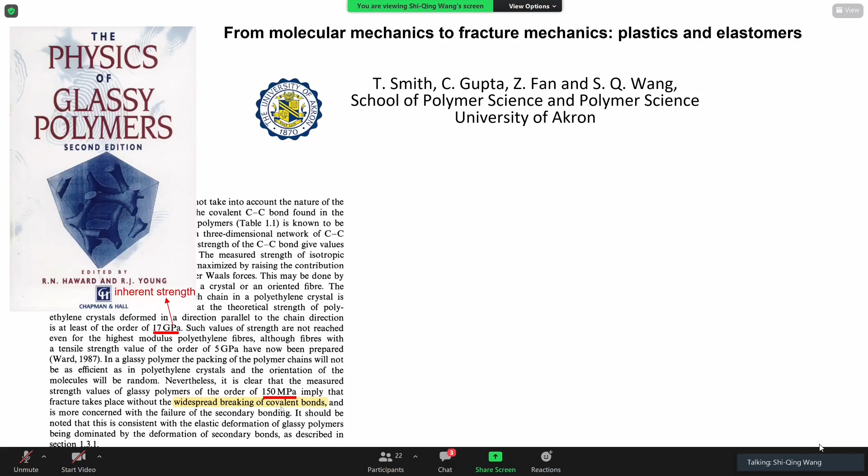Now we finally have a chance to look at this issue of the whole picture of mechanics of polymers. If you open any textbook, we are really puzzled by the fact that the intrinsic strength is always 100 times larger than nominal strength. Many textbooks will say the same thing. So today, I'm hoping to answer a few questions related to that.

These are three main questions: whether the inherent strengths are actually comparable to the nominal strength. In that case, the fracture behavior of uncut polymers really is not a fracture mechanical problem. And I will also try to show and convince myself I understand why and how fracture mechanics works for polymers when you have a large cut. And then lastly, I hope through our work I could show you that when you consider fracture mechanics, there may be an alternative way to think about toughness.

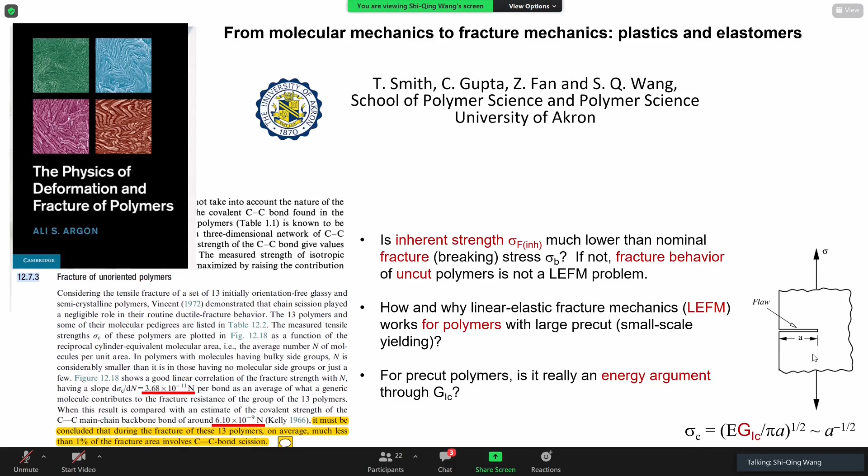Toughness, in the sense of us usually attributing fracture strength to critical energy release rate. This was done, of course, with my students, nothing can be done without them - 3 of my students, and sponsored by NSF.

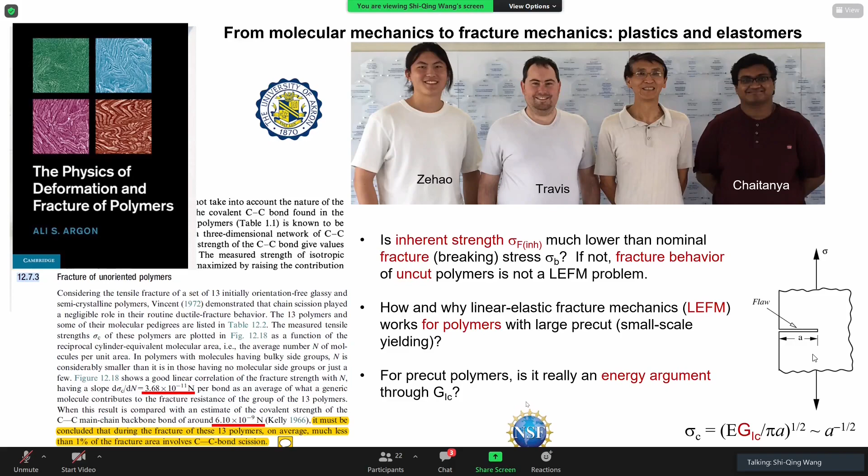So very quickly, I just want to orient myself by saying I'm fulfilling my dream, trying to understand all aspects of mechanical behavior of polymers, from liquid state, where I think we understand it at least qualitatively very well, and then when you cool down to solid state, glassy or semi-crystalline, we have been working on that. Not complete, but we have some significant understanding there, which allowed us to look at the problem of fracture mechanics.

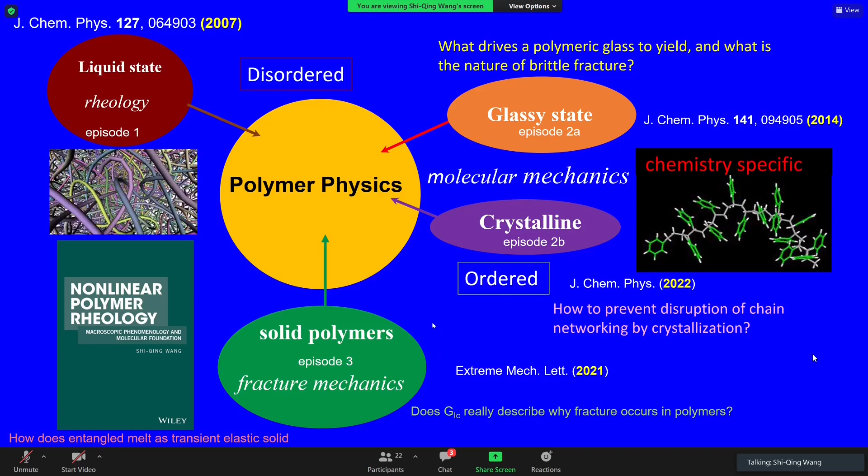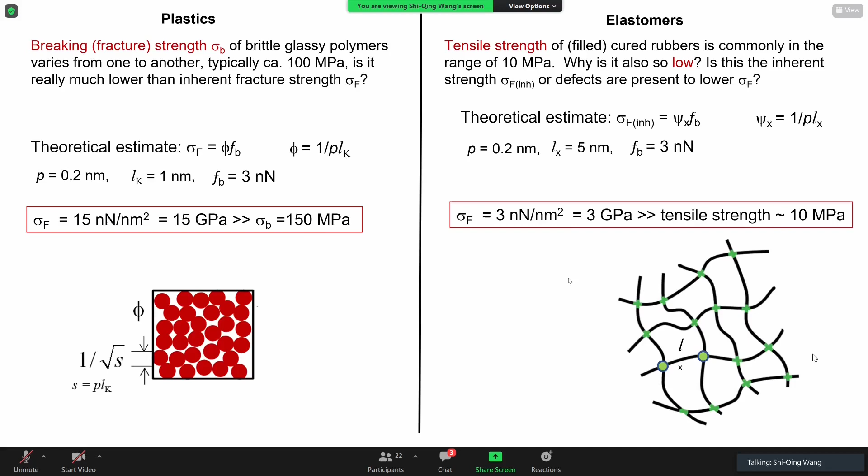So just let me repeat the same thing. For plastics or elastomers, it's textbook description that we typically find the ultimate strength to be much higher than what we observe, both for plastics and for elastomers. We'll discuss why this is, what happened.

Not everyone perhaps is a fracture mechanics person here, so let me just briefly indicate that in fact you build fracture mechanics from 2 approaches. These 2 pillars support the foundation of fracture mechanics.

Either you argue from the point of view of energy - Griffith demonstrated in the case of glasses very successfully. Basically, eventually you can attribute all the fracture strengths to the fact that a certain energy has to be surpassed.

So then there's also the second approach, looking at the stress at the crack tip. But since the crack tip has stress divergence, one has to introduce a remedy by saying that there is a plastic zone. At the end of the day, when you go to the textbook, you read: fracture occurs when G reaches GC.

Or fracture occurs when K reaches KC. In the case of KC, we really don't know what determines KC, but luckily we know that KC is related to G, K is related to G, therefore everything falls back to how to compute for G.

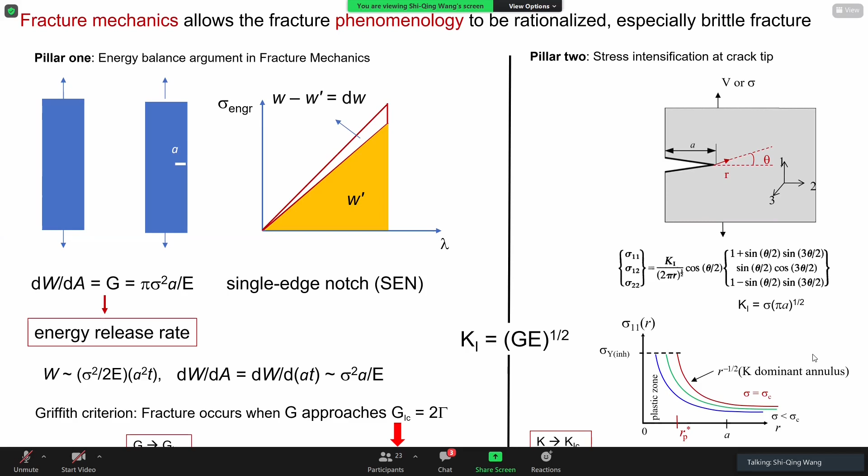So far so good, except when we look at our polymers - much has been discussed on PMMA, polystyrene - you find this G, unlike what Griffith likes to argue, is actually much larger than surface fracture energy, by thousands, or if you use my estimate, even more, larger than the fracture surface energy.

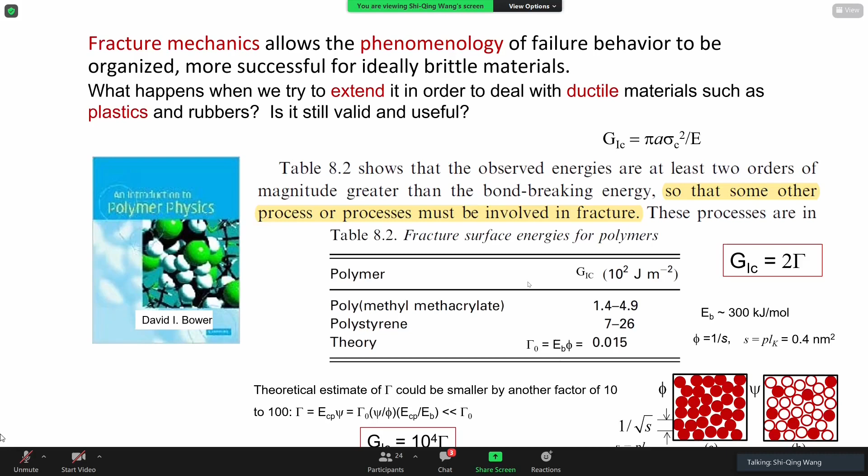So this makes the argument very problematic in terms of what insight we can have. In fact, this being much larger would imply that you actually have no nucleation barrier, meaning this fracture should occur at any level of crack size, because this line basically goes to 0. You only have just this term dominant. Well, it looks very problematic.

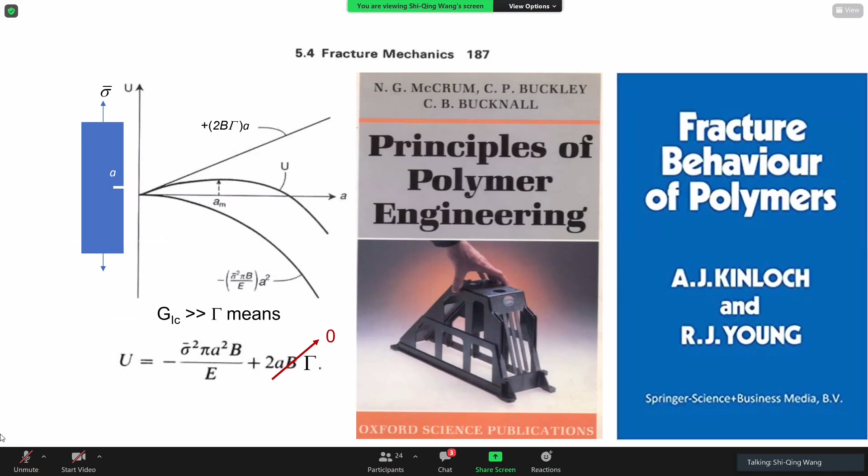In any case, nevertheless, we have marched on, and there were books written on polymers, and many experts have been working on this. So I'm just a newcomer trying to learn what's happening, as a beginner. I have a lot to learn from you folks who know fracture mechanics well. So let me just entice you, intriguing you with these issues.

You find for plastics or elastomers, you basically find that the strength of your polymer is much smaller than theoretical values for both plastic and elastomers. And then for the GCs, the toughness, our estimate of the theoretical ones is much smaller than the experimental. So what's going on?

I mean, this just looks crazy, right? So shortly, I can tell you based on our work, that I'll show you in the next slide, that this happens because the theoretical strength was wrongly estimated. It's not that people don't know, but the question is, how do we estimate correctly?

In the case of elastomers, the strength of polymers of elastomers is wrongly estimated - that we know, because everyone knows the load-bearing strands do not break at the same time. But we don't have a good model for what that strength should be for elastomers. So what about the second question? Since theory doesn't agree with the experiment, then there's a question of what is wrong with the theory.

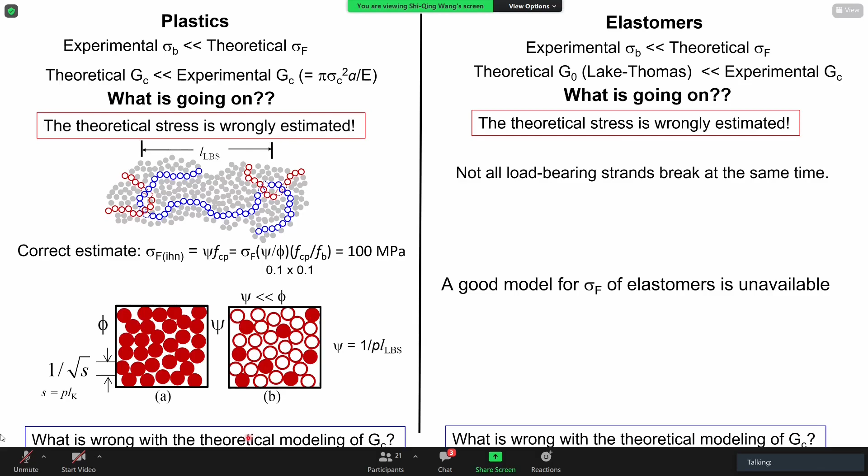So how should we model the theory of GC in both cases? Let me briefly indicate that in the case of plastics...

We have worked out a model that describes how the inherent strength could be related to the structure of the chain network. It turns out that much of the network can break down below the brittle-ductile transition through chain pull-out. So you could estimate the strength of your polymer, which is actually a factor of 100 smaller than the theoretical limit, which doesn't occur—that is, where all the bonds bear load and all the bonds break. This is our old work, so I'm not going to show you more.

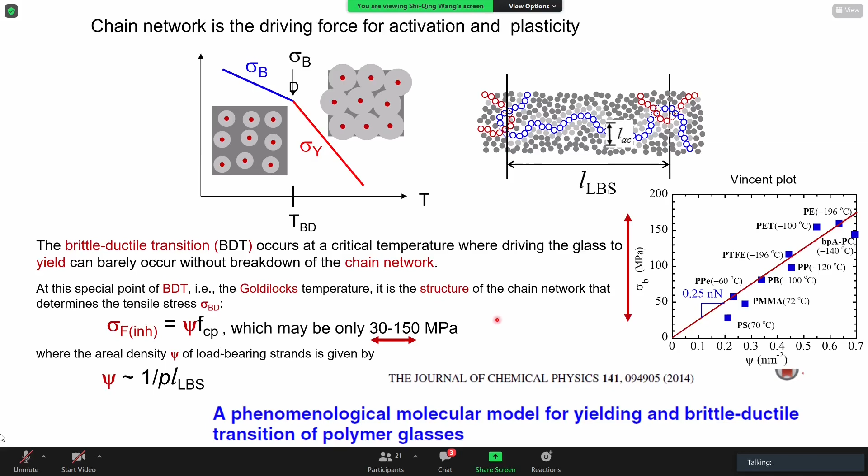So let's move on to fracture mechanics. I've introduced you to the idea that we know what the strength of polymers is. If you open any textbook, we were indeed confused by this. We know that when you have a big cut in your polymer, your strength is inversely proportional to the square root of your cut size. That's classical fracture mechanics.

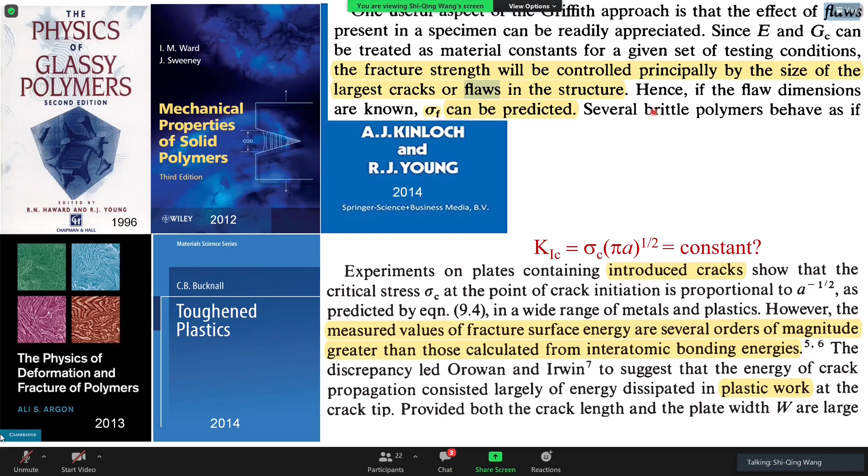But the same thing raised in any book is: why is GC three orders of magnitude larger than the theoretical estimate? On the other hand, how come this relationship works, as if fracture mechanics works very well? The past is summarized by this book by Kinloch, basically suggesting flaws are always the reason for the problem, especially for the fact that the theoretical strength is different than the nominal strength. So we are keen to find out whether the theoretical strength is indeed much larger than the nominal strength.

So we decided to look at birefringence. It's a beautifully simple technique for this particular problem, because this is really a two-dimensional problem—two of the principal axes are in the plane of your sample, with the third principal axis perpendicular to the sample. So you can validate birefringence as a way to report local information about stress.

And that's what we do. The whole idea was to take an uncut sample, like this movie shows, and build a relationship between the color change—which is birefringence or retardance—and the stress. There's a reliable correlation, as this figure shows, largely linear between stress and retardance. Once you have that calibrated, you can get spatial information about how this birefringence builds up at the tip.

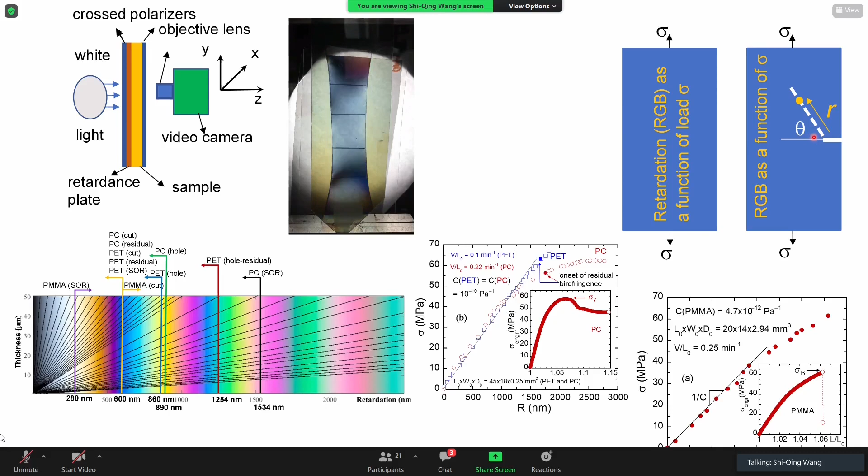Let me give you two examples. One is for plastics—we've written a long paper, already released, posted, available to the public. If you look at the plastics, this has of course been done for PMMA exactly 60 years ago.

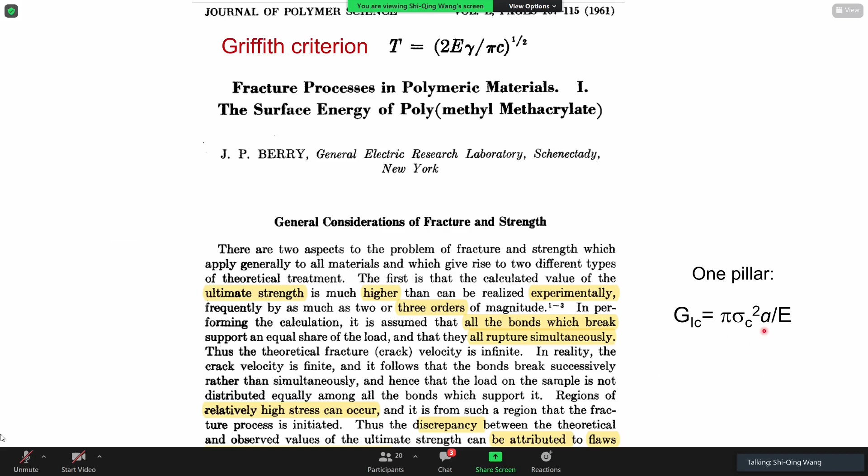It's been done, except we're going to look at it a little differently. Instead of just trying to measure what GC is through its operational definition—he just had a different notation than the modern one we're using—except for the notation difference, he just measured GC. We were interested in what controls GC, what determines GC. That cannot be answered from this operational definition, by definition.

So we'll look at the PMMA. It's rather challenging to do because birefringence of PMMA is rather low, so we have to use rather thick samples. But we succeeded in resolving the distribution of birefringence at the tip and converting that back to stress, plotting that stress as a function of, for example, reciprocal square root of the distance to the tip.

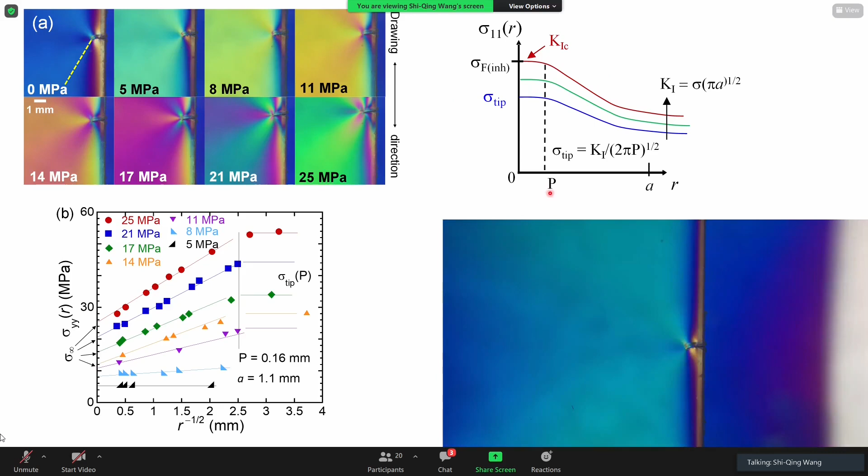So this is the data. This data actually confirms a schematic plot like this. This plot looks somewhat unfamiliar to fracture mechanics, because I showed previously—pretty fast—that the tip stress was supposed to converge to a common value. But we show that at lower stress, the tip stress is lower, and you can carefully look at the movie to confirm that.

Having learned that, my student Chaitanya used different styles of cutting the PMMA and reported his tip stress in that stress-saturated zone as a function of the operational definition of K. He found that this tip stress correlates linearly with K. By dimensional analysis, this means the constant must involve some characteristic length, in the form of 1 over the square root of the length. In fact, this relationship holds all the way to the point of fracture.

Moreover, this plot shows that at fracture, the local tip stress has reached a level essentially comparable to what you see in an uncut sample. So we are starting to be able to claim that the inherent strength is actually not much different from the nominal strength.

This relationship holds all the way to the point of fracture, at which my tip stress is at Kc. So we end up having a relationship showing that the tip stress, which reaches inherent strength, is correlated with Kc through a characteristic length scale that indicates the stress saturation zone.

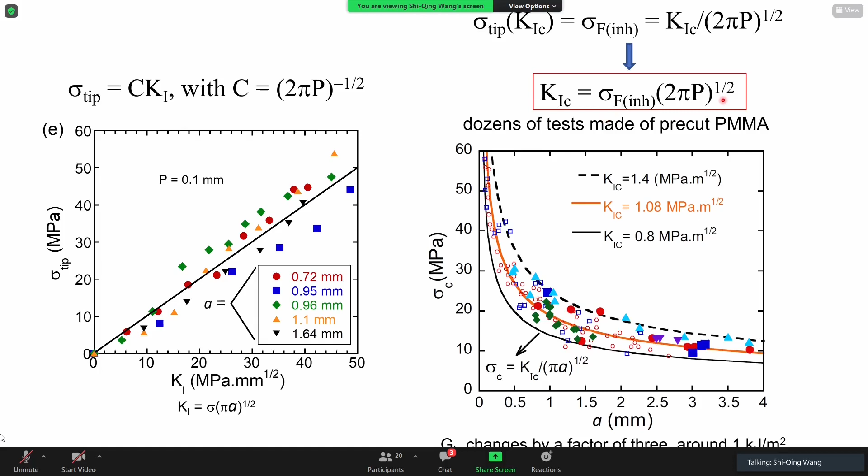So why is there a spread? Well, this formula actually is starting to answer that question, because the inherent strength will not care how Barry cut his sample or how Chaitanya cut his sample. It will be similar, but this P might be different. So we'll get to that a little more later.

In any case, we could look at this so-called fracture mechanical problem purely in the linear elastic region, even for ductile material. So our goal was just to find all the polymers to which we can apply linear elastic fracture mechanics. For PET, which is ductile, before yielding, before the tip yields, we should still be able to investigate how stress builds up at the cut tip.

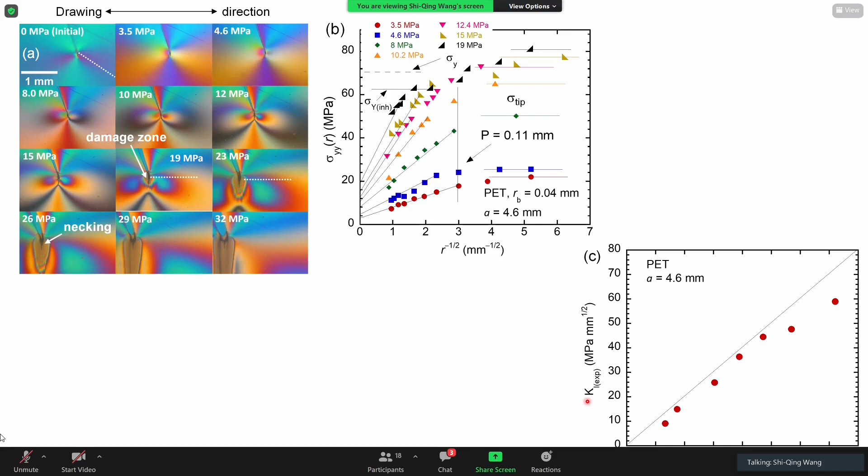And you find a similar result. In fact, you could find the experimentally determined K, the so-called stress intensity factor, against the operational K. They are almost comparable in this case, because we use a rather large cut size. So in fact, we can borrow that result.

This is just a movie showing the PET cutting. We can borrow this PET to illustrate the fact that the Kc changes, because this stress saturation zone is different depending on how we prepare the cut. When you make a cut, you naturally involve some damage mechanics, causing natural bluntness in your sample. That controls how stress builds and where it saturates. As a consequence, you get to different levels of Kc.

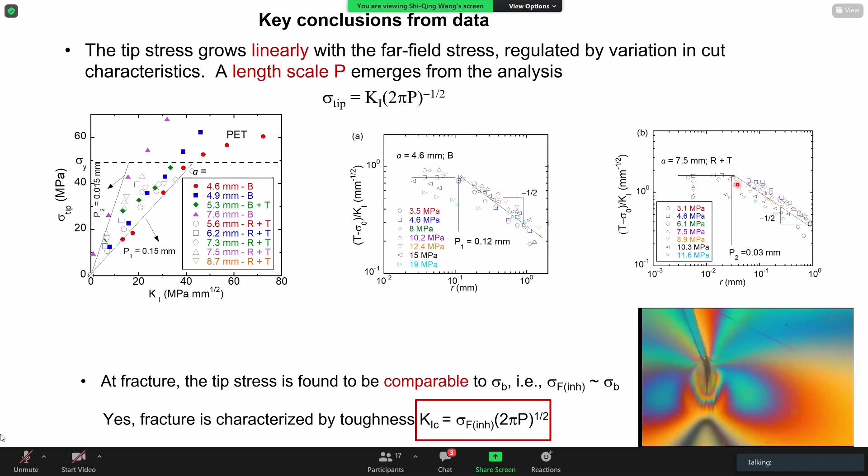So with that, I think we are quite close. We were at the end of the plastic part. I certainly need to emphasize what we know in fracture mechanics. I learned that without theoretical modeling, we have fracture occurring when K reaches Kc, G reaches Gc.

Gc, Kc are given here. They are operational. They themselves give you a measure of what they are, but it does not tell you what determines their magnitude. Okay, and of course they are equivalent, in the sense that Kc can be computed from Gc and vice versa. It's the same thing in that sense.

Now, what we learned through playing with this birefringence, to learn about the stress buildup at the point of fracture, we learned that Kc actually has some dependence on the material properties. In fact, we are explaining why Kc is a material parameter, because the inherent strength is a material parameter.

And this P is a natural length scale that comes into the problem when you prepare a cut in the sample. So in that sense, when we are dealing with glassy polymers, we have already dictated that your Kc will be more or less constant, not going to change very much. But of course, Kc for glass is very different, because the P will be very small. For example, for glass, it will be nanometer scale.

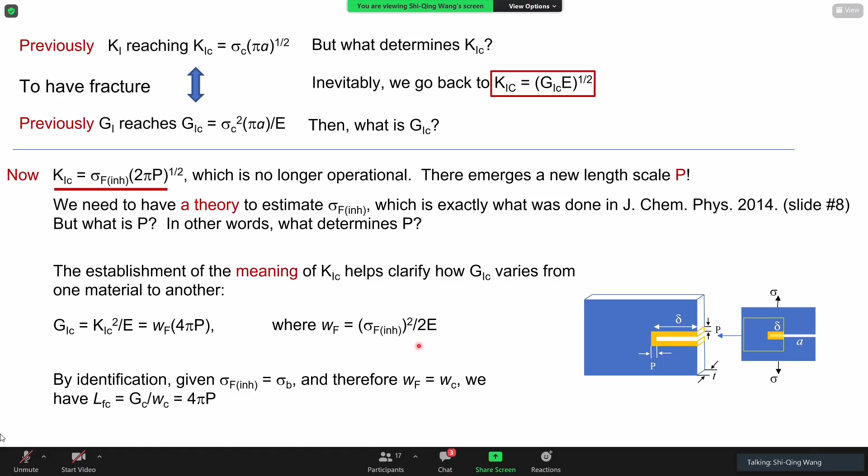More interestingly, since they are related, you can even have an expression for Gc and ask what Gc is determined by. Well, it's determined by the same characteristic length, and it's determined by the energy associated with this inherent strength. And you can assign some specific intuition to what this P is. So let me just use my next 5 minutes to talk about elastomers.

Of course, one can do elastomer testing in various ways. This is a movie showing a piece of elastomer in the first way, single edge notch. You can also do tearing, or pure shear.

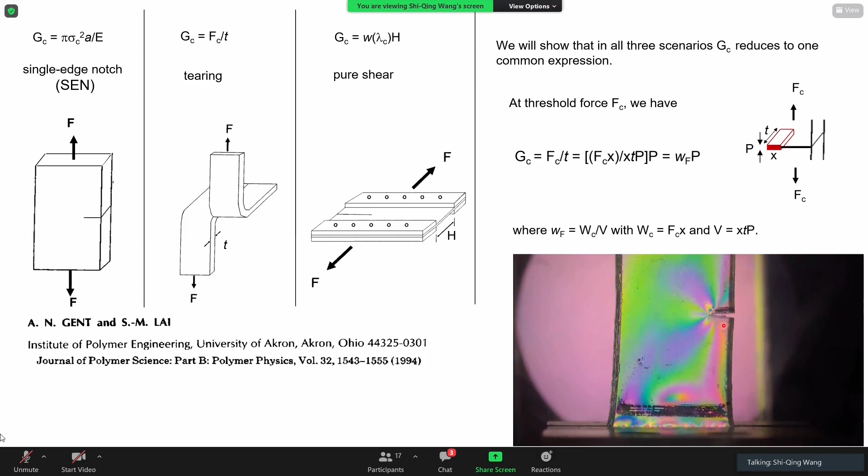The initial work, after learning what fracture mechanics is about, is by Rivlin and Thomas. He very cleverly thought about using pure shear as indicated here. The only length scale in the problem is the height of the sample. The other dimensions are much larger.

In that limit, he was able to argue, using the approach of so-called energy balance, to compute GC. He argued that GC should be given by this last expression here, proportional to the height of the sample, indicating that this is only a matter of energy storage in the entire sample.

This really is puzzling to me. I just have a hard time visualizing and understanding this, as if I have some trouble with this energy balance approach. So we can now actually try to understand where this comes from.

It turns out it goes back to what we have learned from plastics, that is, the fracture is determined by the stress state at the tip. When the sample is much taller, it turns out the stress builds up much more quickly at the tip.

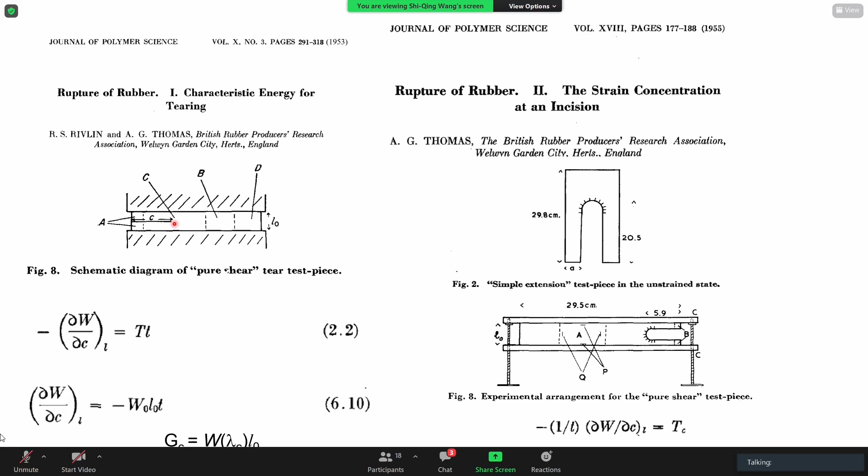So it turns out you are really struggling with why this is happening. In any case, let's at least confirm it's doing that. My student Zhehao made 3 samples, 10 times apart in terms of height, and he went around to find where the fracture occurs and calculate GC according to Rivlin-Thomas.

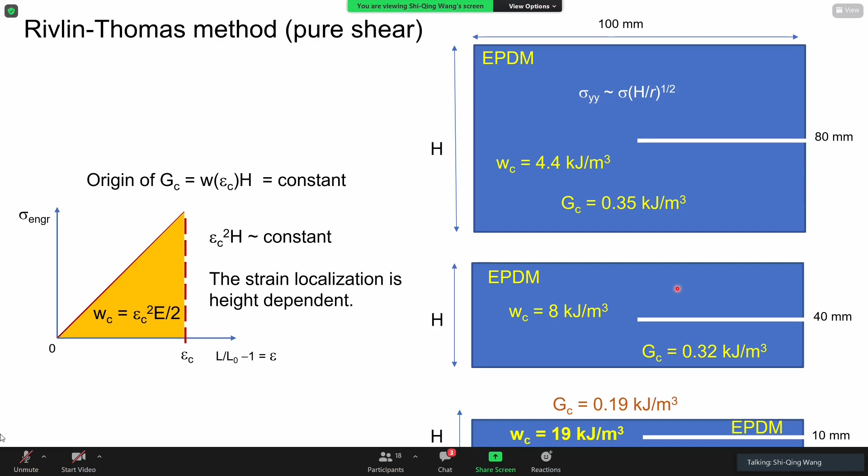And here are the 3 pictures. Amazingly, he was able to see that no matter what your height is, the moment fracture occurs involves the same state of stress at the tip.

So maybe I will do it later - this movie is not playing on its own. So this is just a pure shear movie that we can come back to and play.

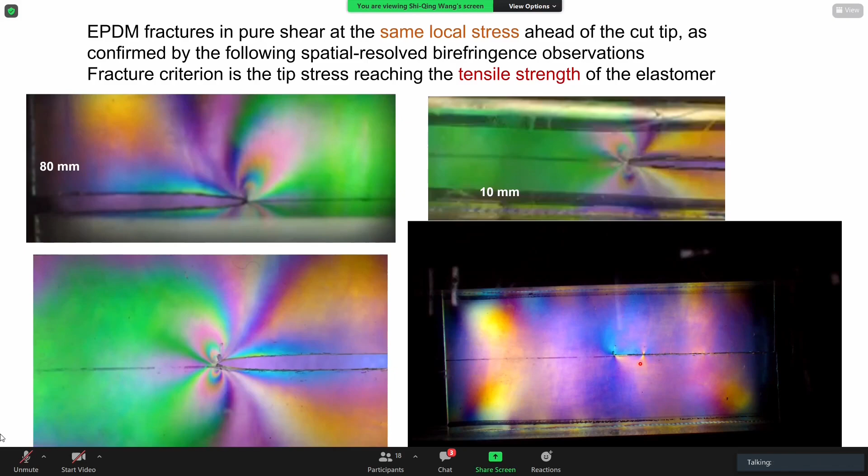In any case, we were basically interested in contrasting a single edge notch study involving different dimensions, different cut lengths, and pure shear. Look at this pure shear problem.

The tip stress converges to the same master curve if you insist that your K for pure shear involves the far load stress and the height of your sample.

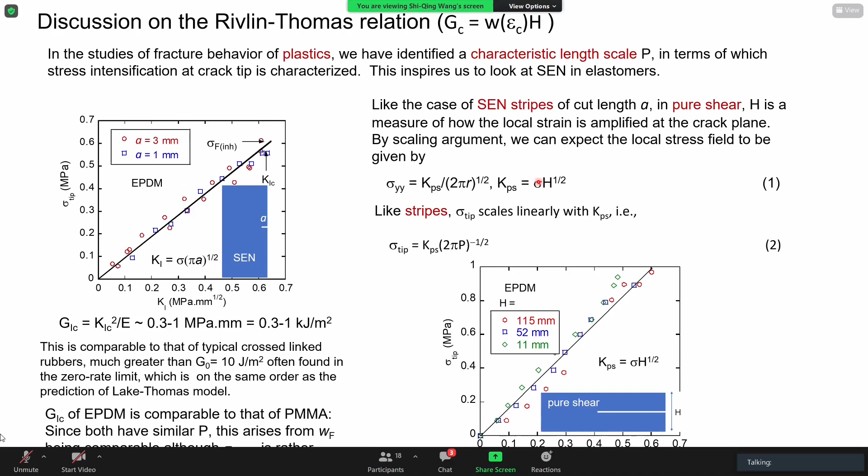So this allows me to reach the demonstration of where the Rivlin-Thomas expression comes from. It turns out, without going into any details, the plastics for single edge notch or pure shear eventually involve a similar thing.

In other words, the tip stress reaching inherent strength, and your KC at fracture, actually involves a characteristic length P. And you can argue very easily that the Rivlin-Thomas expression can be shown to be inversely proportional to H, because your tip stress is proportional to K.

So in any case, at the end of the day, I'm happy to tell you that the Rivlin-Thomas formula works because the stress argument is the reason it works. So you can also patiently calculate or evaluate the stress build-up, and you also find that there is a characteristic length showing the tip size.

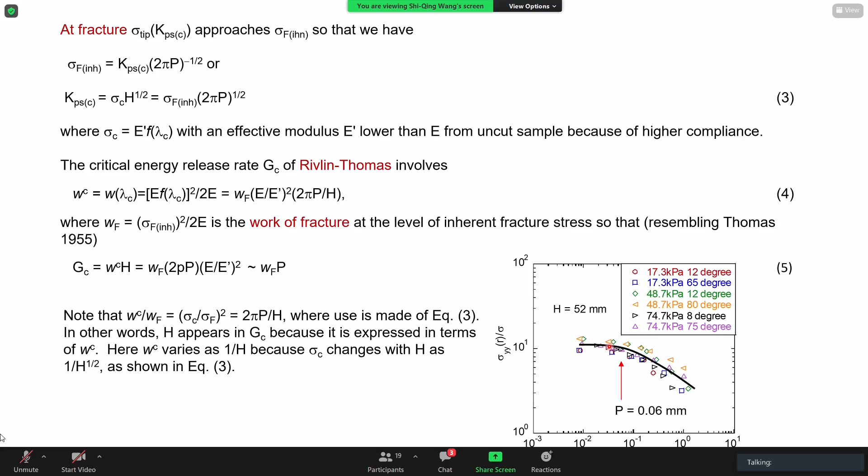So these are just similar results further confirming the result. And the reason we figured out that the prefactor is 1 is we compared pure shear and the single edge notch. By comparing between them, and at fracture involving the same inherent strength, you could indicate that the prefactor is unique.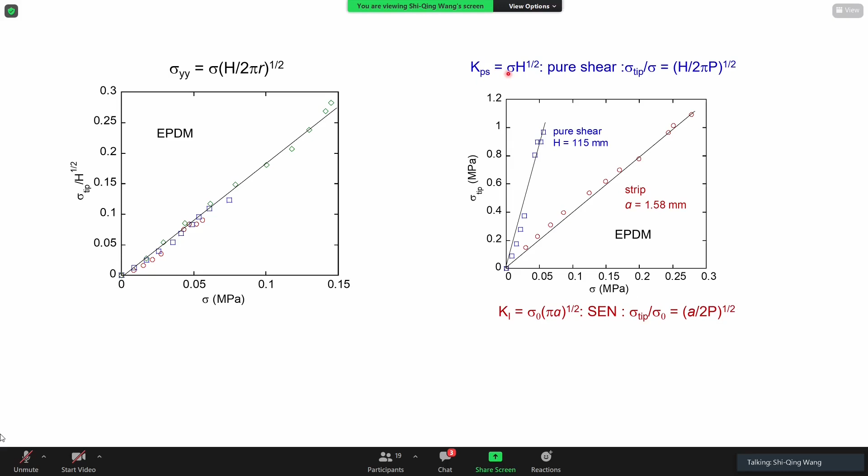So with that, I think I'm reaching the end in terms of a summary through this birefringence study. Well, looking at the tip, we not only look at the tip stress, we're looking at how the stress builds up toward the tip and reaches saturation, as demonstrated here.

And this gives rise to meaning about what determines KC. And of course, that also means we know how GC is determined. It's related to the strength.

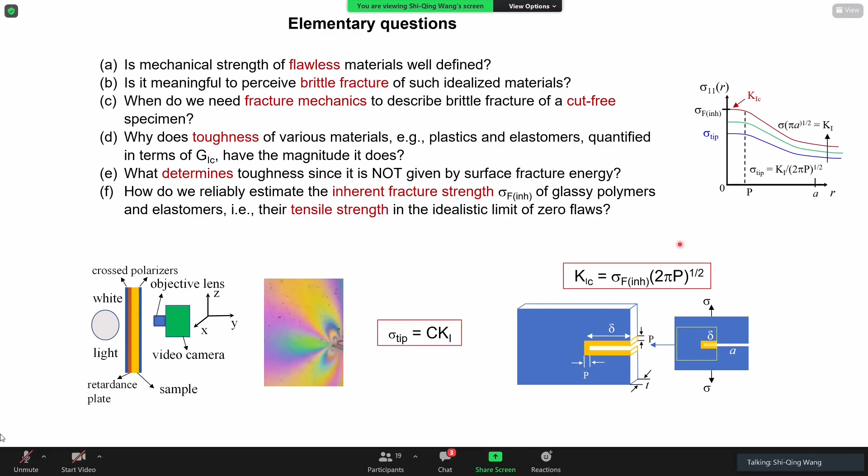It has to do with how blunt the cut is, or how the material responds during fracture, in terms of a natural length scale coming into the problem. So with that, I reach the conclusion.

Basically, we set out to find that essentially the inherent strength and nominal strength are similar. Therefore, this problem of fracture in glassy polymers is not really a problem of invisible flaws making it weaker. It's not weaker, it's just what it is.

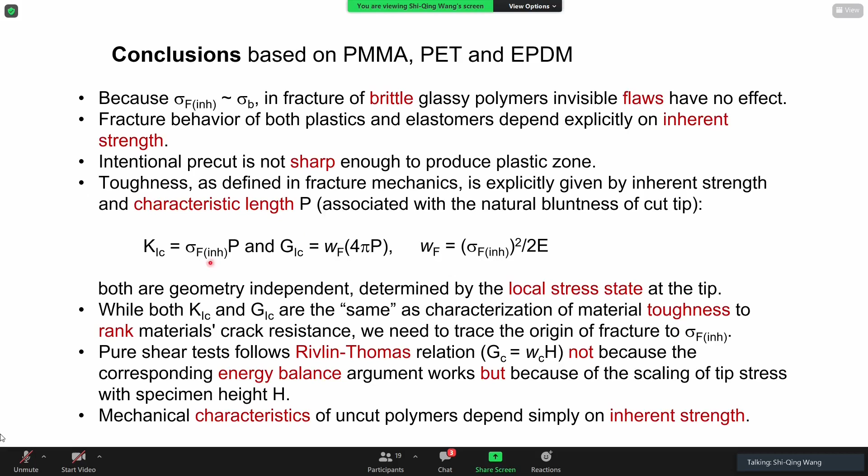And for our polymers, we have to find out what determines this inherent strength. The mystery right now is, of course, this characteristic scale P. We still have very little clue about how the damage mechanics determines the magnitude of this length scale P. But the good news is we know what KC and GC are in terms of what determines them. Okay, I'm done.